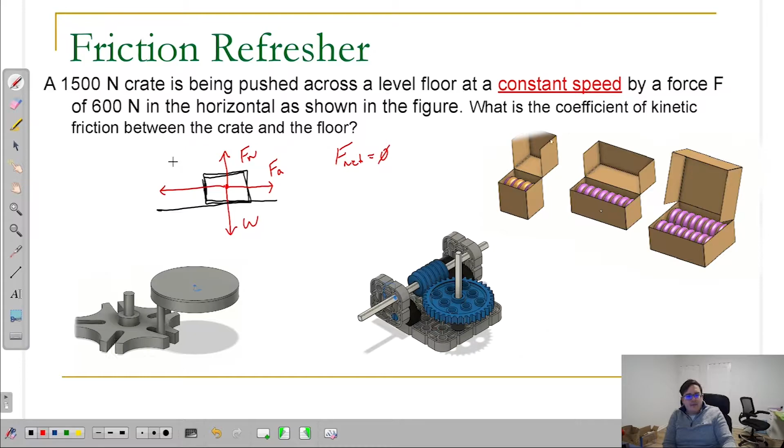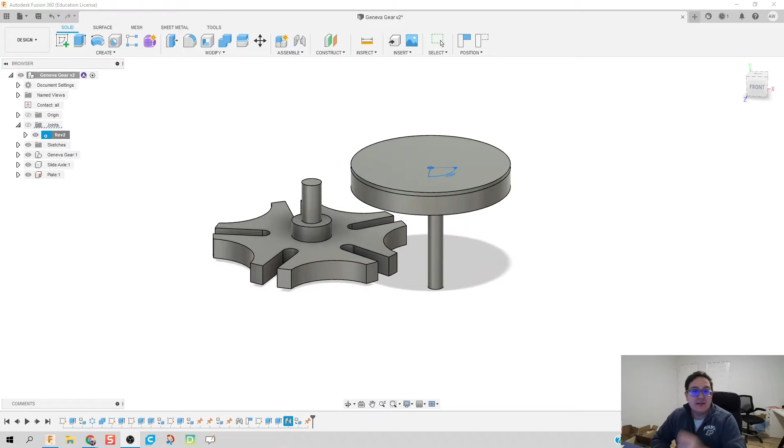I was finally doing some late night tinkering and actually got a Geneva Gear to work. Now, one thing that kind of hit me when I was making this is: is a Geneva considered a gear or is it more of a cam? I think an argument can be made kind of both ways, but I'm willing to bet there's a technical engineering term.

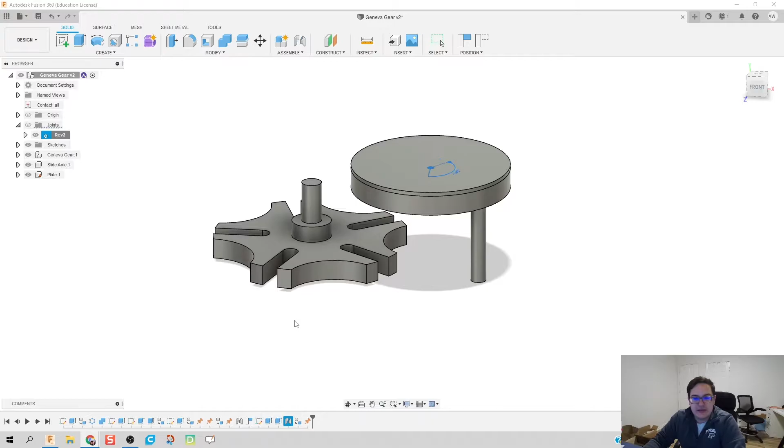But in any case, we're going to make a Geneva Gear. Before we do that, there is one thing I'm going to bring up, and that is this program right here. The problem with making a Geneva Gear is that the relationships in there are very complicated. But, and I kind of ruined my own little surprise here, this website, and I'll put it down in the comment section below, will do the calculations for you to make your Geneva drive.

What I find really, really interesting is that the Pythagorean theorem is in a Geneva Gear or Geneva Cam, whatever it is. The Pythagorean theorem is true, and I was really floored by that moment. Super nerdy, but I find it absolutely interesting that the Pythagorean theorem is applied here.

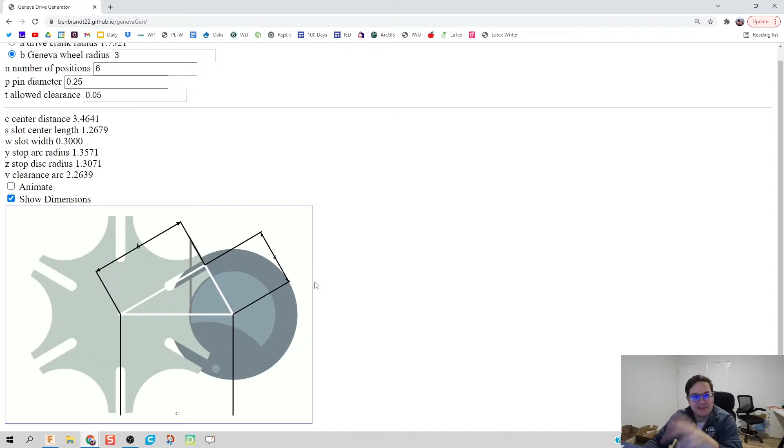So the cool part about this is that we can define a couple variables when it comes to our gear. We can define A or B in the Pythagorean theorem, the number of positions that it has, and how thick a pin is with allowable clearance, and it will calculate the rest for us. It will go ahead and animate this for you. I'm going to show you what it should look like when we create this successfully. So now I'm going to drag this window off to the side, and we're going to build this gear.

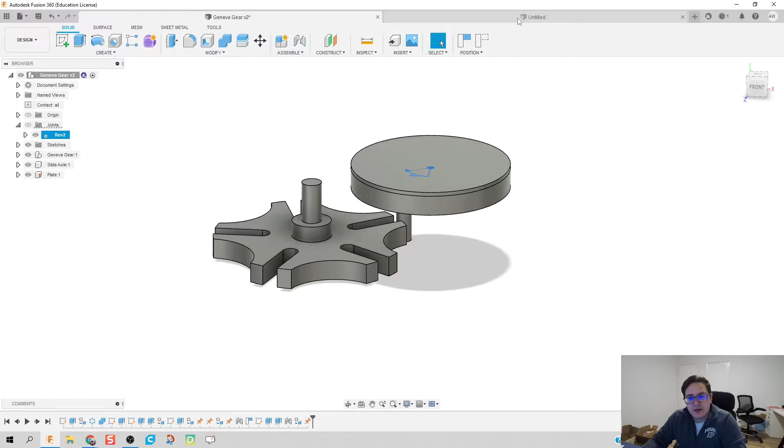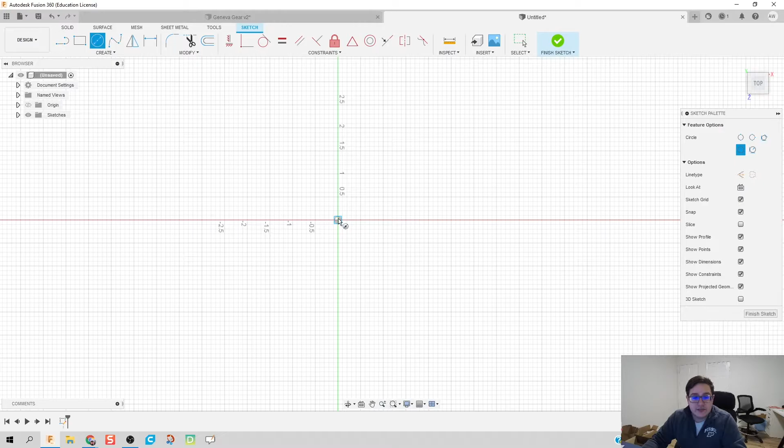Now, why would we want to use contact sets rather than joint or motion links? Because this is considered a non-linear relationship. So we're going to create a sketch. We're going to create all this, but we're actually not going to use joint links here. We are, however, going to draw this out. So we have two circles overall: the Geneva and the drive crank. We're going to throw in some dimensions.

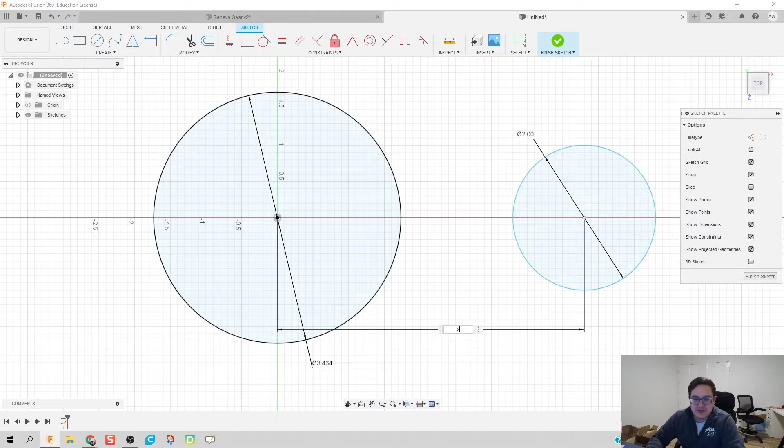The dimension for B, my Geneva wheel overall, is 1.7321 for the radius, but we're going to times that by 2. And the drive crank radius is 1 inch, so we're going to make that 2. The dimension between these two is going to be your C, your Pythagorean. Oh, that's just so cool. Your C, which is going to be 2 inches. And from here, we're going to start to do some other things as well.

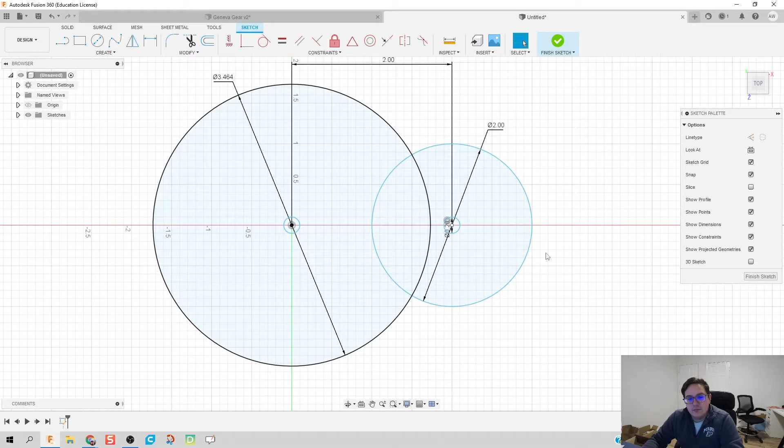I'm going to move these dimensions out of the way because it's going to get a little cluttered in here. It gets a little crazy. I want to keep this as organized as possible, but I'm still going to try to do this all in one sketch. We do want a center axle to go through both of these, that way we have something for these to revolve around. And we're going to create a couple different components from there.

Next thing I'm going to do is create my slot. So we're going to click on Create, Slot, Center to Center Slot. I'm going to go from the very top of my circle and go on down. Now my slot length is going to be 0.7321.

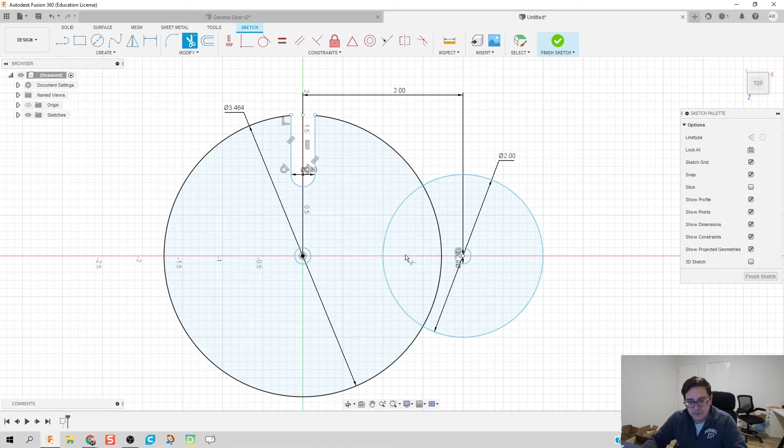And my slot width is going to be 0.3. Okay, I'm going to go ahead and hit T for trim. We're going to trim up some of this. And we are going to then also draw a circle. I guess I'll take that a step back. Let's do a circular pattern of the slot. So we're going to go ahead and do this U-shaped geometry around this center point.

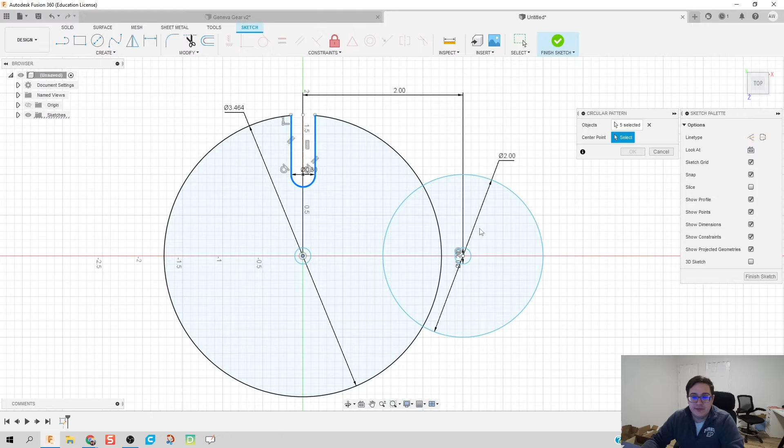Oh, hold on. Deselect that center point. Let's select center point and then select the center point. There we go. There we go. Bump it up. I'm going to go ahead and do 6 and then hit OK. Now I'm going to go ahead and T for trim. I noticed we already did something wrong, but it's okay. We can just fix that dimension here in a second.

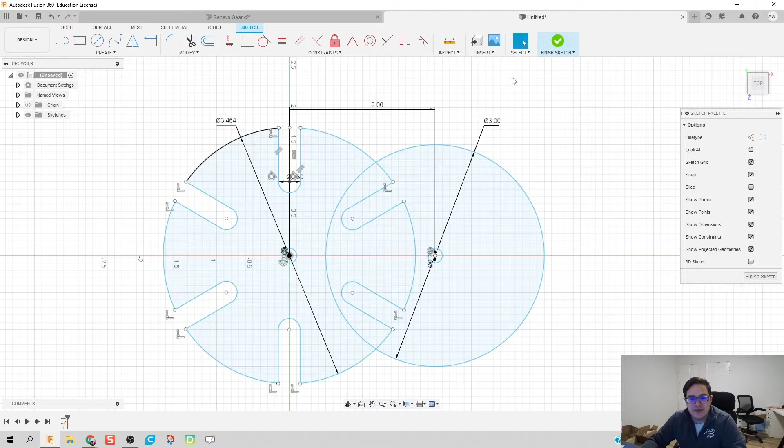Okay. This already looks funky. This isn't even overlapped well. Well, that's because the value it gives you here is where the pin is going to stick up through, not the diameter of the actual wheel. So we do need this to be bigger. I'm going to go ahead and make that, 4 looks a little big. Let's do 3. I just need it to be big enough to fully and completely cover these pin slots.

Okay, I will now draw another circle. Right click, make it a construction circle, and give it a dimension of what we had earlier for a value. That's going to be 2. So what we see right now is that this circle overlaps through the center of the slot paths, which means everything's looking great. I'm going to hit C for circle. I'm going to draw on that to draw my pin for my slot, and our pin is 0.25.

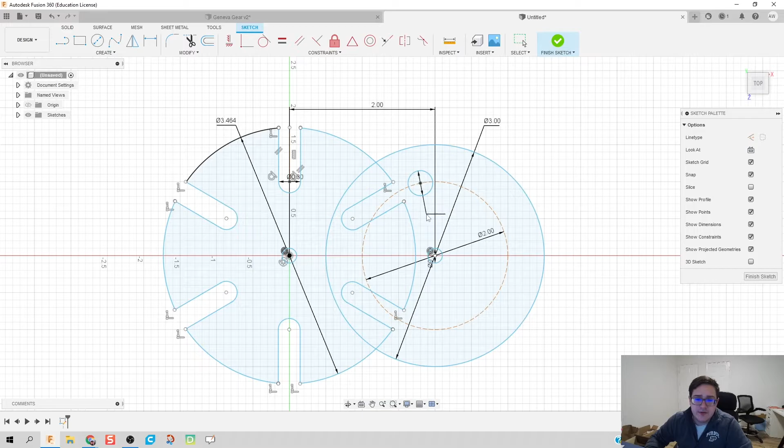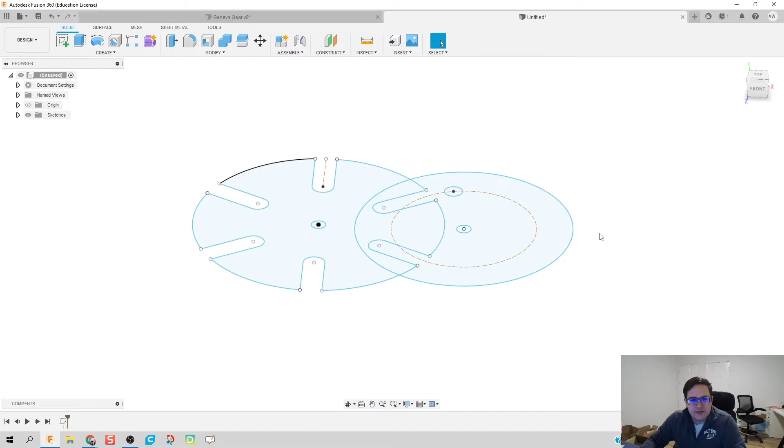Okay. I believe we have almost everything we need for our sketch, except for one tiny piece. I'm going to put that tiny piece in later, so let's see if this works for now before we get too far into it. So I'm going to go ahead and click Finish Sketch. I'm going to rotate this down a little bit, and everything kind of looks good. I'm going to hit E for Extrude. We're going to go ahead and extrude these 2 pins out. Actually, you know what? Let's do them individually, because I want one to go up.

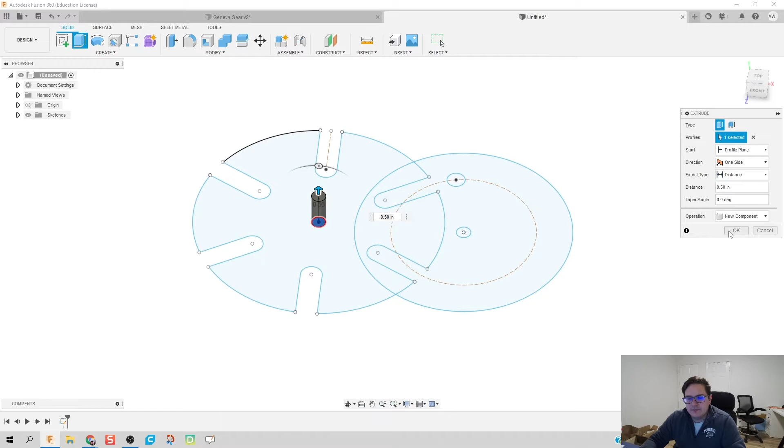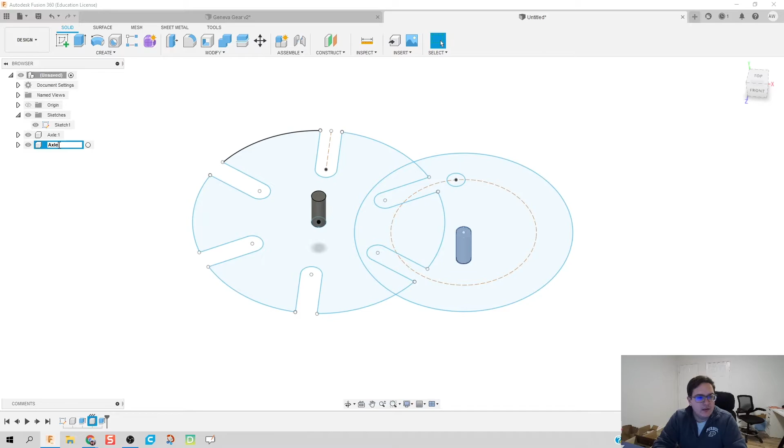We'll do it as a new component. Bring that sketch on back. We're going to extrude this one down as a new component. And I'm going to rename these. Let's just call it Axle. Axle 1, Axle 2. Hit E for Extrude. We're going to go ahead and bring this profile on up and make it a new component. Looking good so far. Click OK.

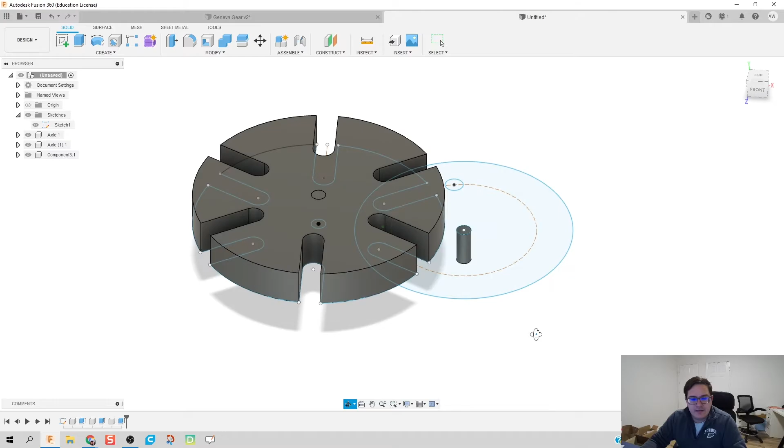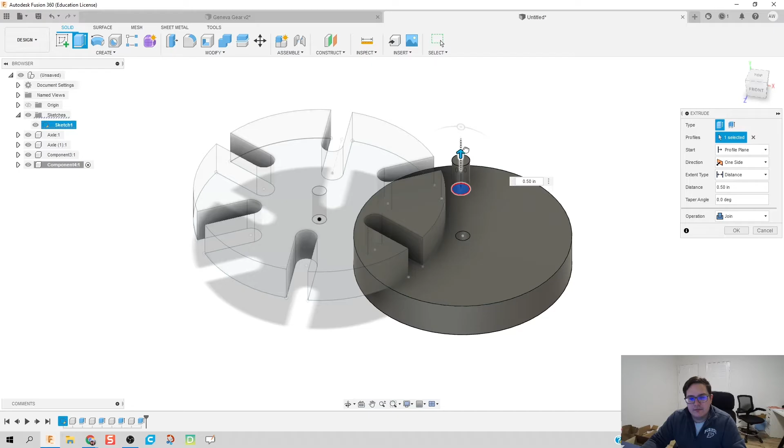And then we're going to go ahead, E for Extrude, and we're going to bring the rest of that profile down. Make that a new component. Oh, I forgot to click that one last little piece in there. Let's fix that. And then E for Extrude. Let's go ahead and bring this last little peg up. And make that a join, because we want this peg to be part of this bottom cam down here. Alrighty, let's see how this works so far.

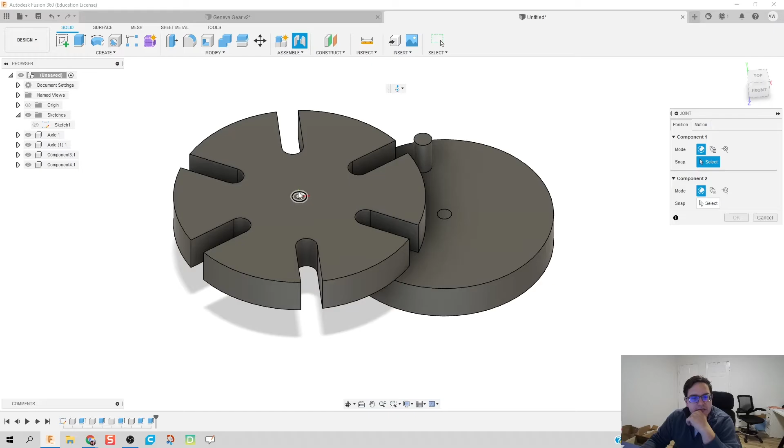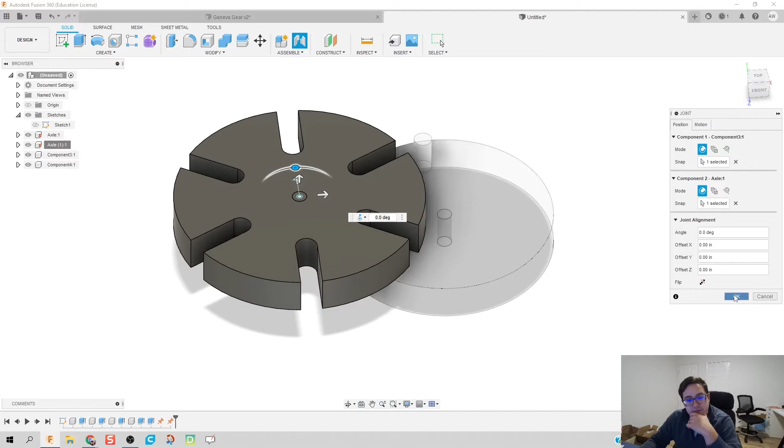I'm going to make that sketch inactive because it's kind of in my way now and makes things a little blurry. So let's do a joint. Before I do a joint, I always like to do this step. I'm going to right click on my axles and we're going to ground them. Make sure they cannot move. Now let's click on joint. Let's do the center of those 2 objects. That looks like it rotates correctly. Looking good. And then we're going to click joint again.

Do the center of those 2 objects, and that looks like it rotates correctly. Click OK. Now at this point, I'm curious if we're going to run into any issues. Let's see. Let's turn on enable all contact sets. So that means none of these pieces can run into each other, and I should be able to rotate this all the way around. Now where we might run into a little bit of issues is if you created too much of a tolerance or not enough of a tolerance. Fusion might start to cry on you, and the contact sets are like, whoa, whoa, that's too tight of a fit. But this is looking pretty good.

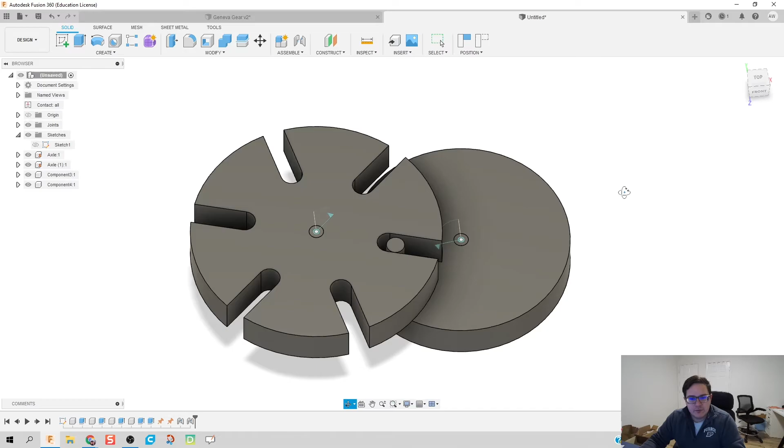Now, what we are going to do in here is we're going to try to see if we can get that last little circular piece in there to fit correctly. Let's try it out. So what I'm going to do is I'm going to go back to my sketch. Let's double click on the sketch. Let's zoom in over here and let's draw another circle. This circle is going to be where the clearance kind of resets for the peg. Let's draw a line. Let's cut this. This is going to be opposite of our peg, so I'm just going to draw a line across my circle there and trim this line up.

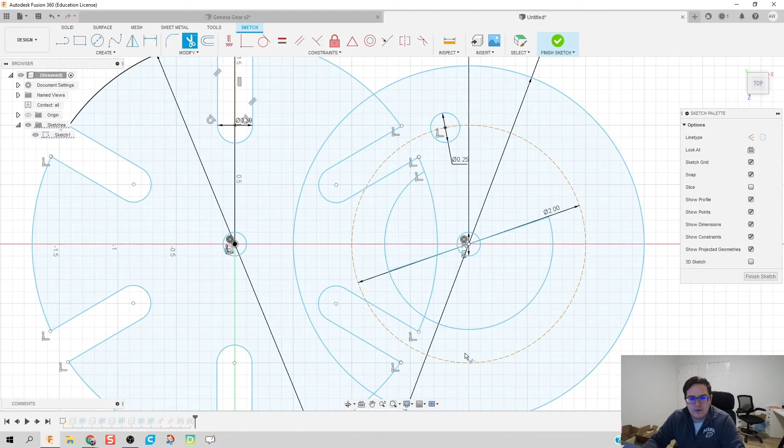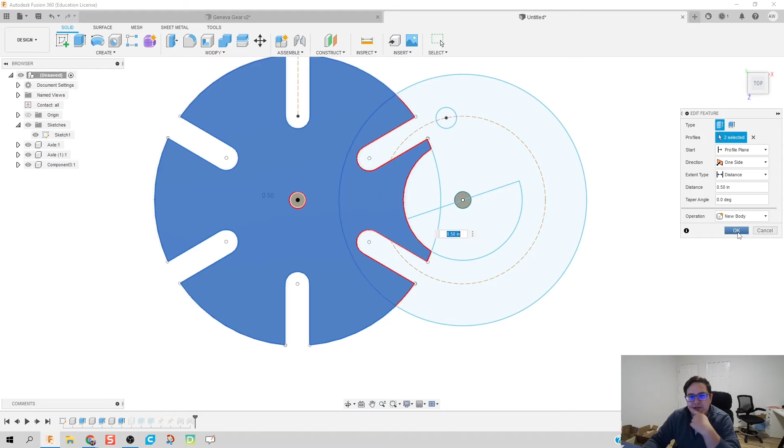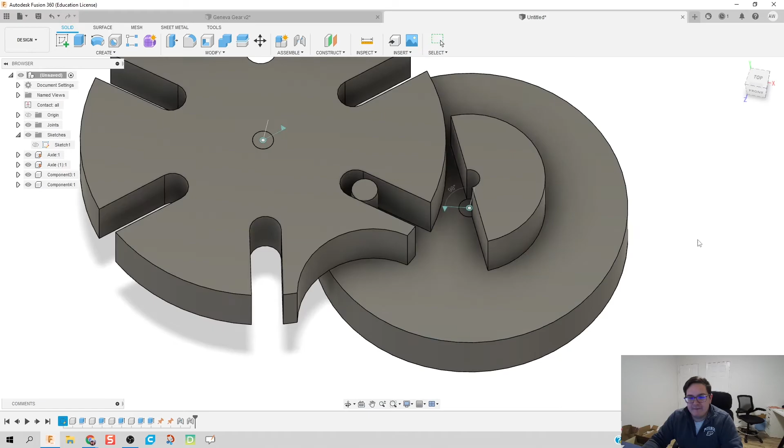Let's see if that works. I don't know if it will. What we're going to do here is we're kind of going big brain with it. Let's go back. Let's go into this extrusion right here, and let's deselect these two pieces. I think this is going to work. Let's see. Oh, it'd be so cool if it did. Okay. And let's go in here and, for the peg, let's also select these pieces. Now, we haven't done the full rotate. We haven't fixed this. I'm just testing to see if this will work. Oh, that looks beautiful, folks.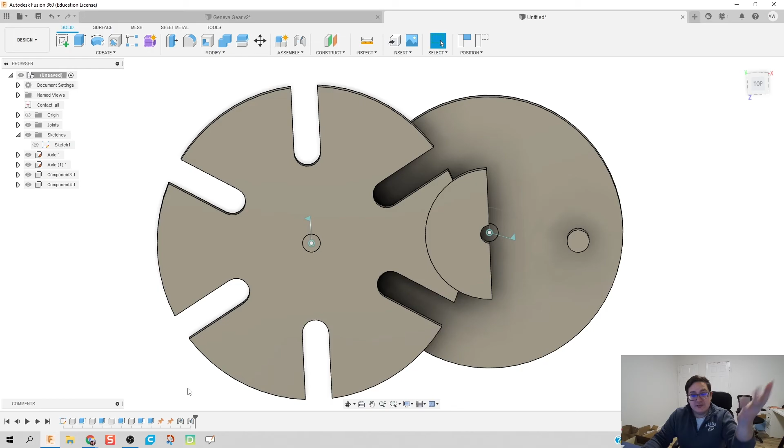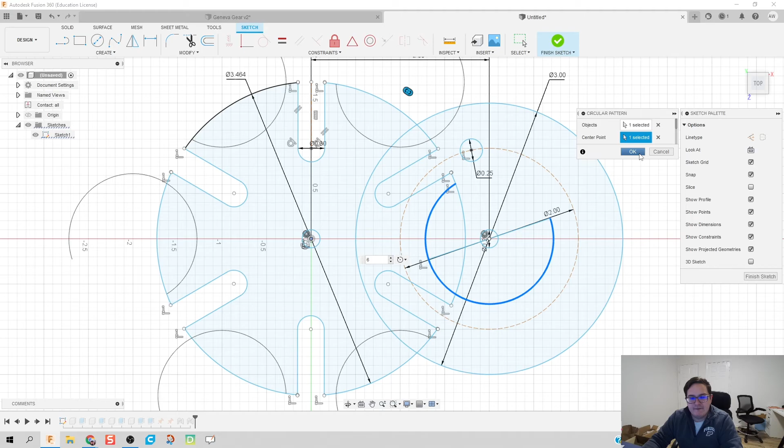So all we need to do now is to take this and rotate it all the way through. That's just one little thing. Let's go back to our sketch and let's fix it. So I'm going to double click on the sketch and we're going to go to circular pattern. We're going to take this arc right here, rotate it around that center point, and we're going to do that 6 times. Click OK. We can trim this up if you really want to, if that's bugging you. But that puts in all of my little pieces. That looks great. Let's go ahead and clean those up just a little bit more.

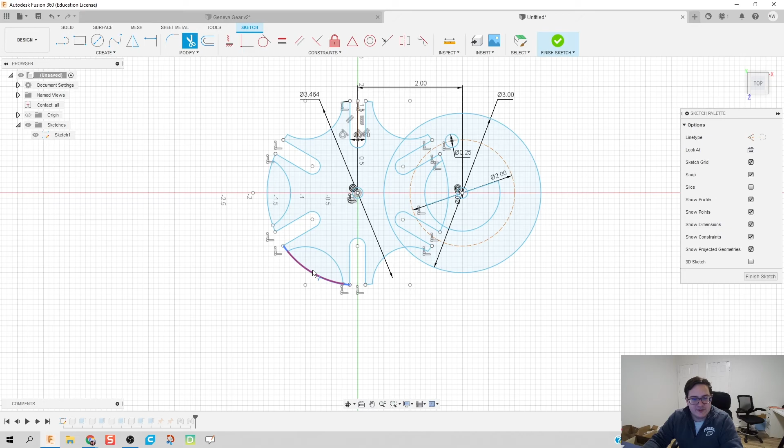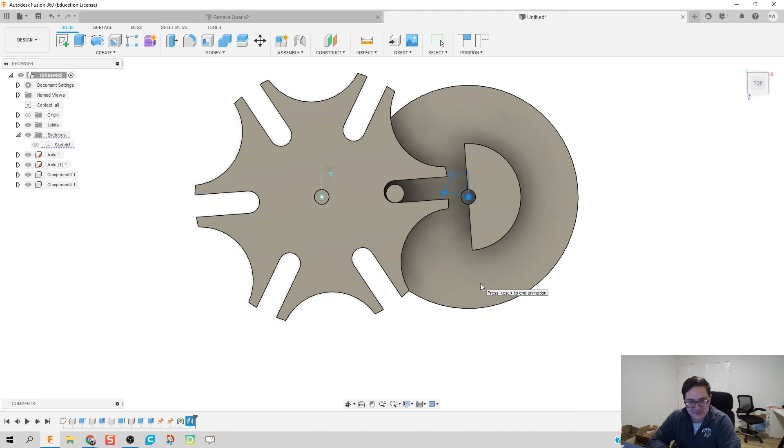Oh, this is so much fun. There's my Geneva Gear in its full entirety. Hit finish sketch. C'est magnifique, it's great. Oh, look at that, folks. We made a Geneva Gear using the calculator we found online. If I animate the model, are we going to work? Oh, it's crying a little bit. Oh, because silly me, I was doing the wrong gear, or the wrong joint. Let's animate that side. That way the driven cam can affect the thing it's supposed to. Looks wonderful.

Alright guys, hopefully this video has been fun for you. I'm looking forward to making some other videos here soon that get at stuff like this. It would be really fun to build, maybe even fun to 3D print and have as showcase examples in the classroom. What I would like to do long term is have a pegboard system of all these different gear interactions rather than just pictures. They can actually go up and turn a crank and actually see these in action.